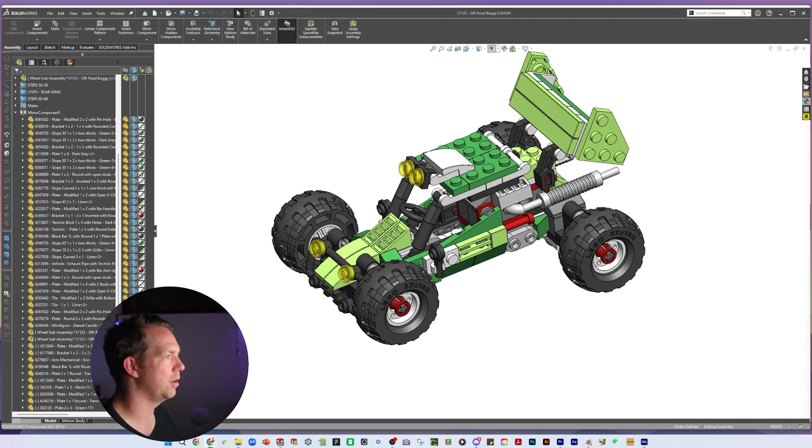I think I like that one the most. In this episode today, we're just doing one model.

It's here. This one. Nice and simple part, but a little bit of geometry, a little bit of detail, using a shell feature and some other tricks. 5 features in total.

Let's check it out. So these parts are called a slope curved 2x1 with 1 1/3 recessed stud. Not overly complicated, so nice simple geometry. This is a good one for beginners.

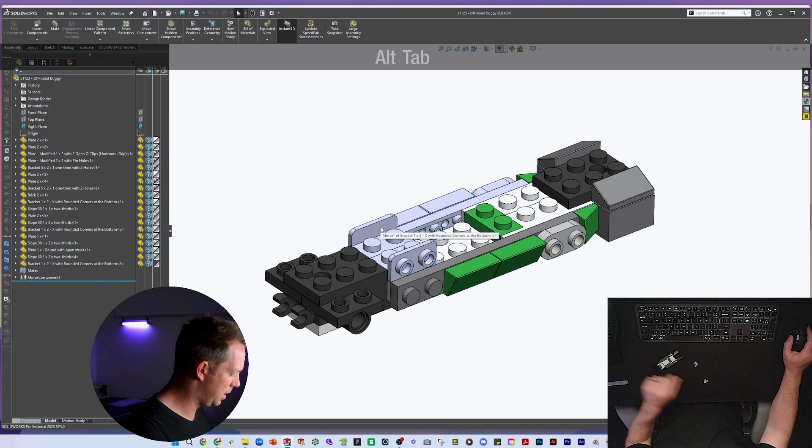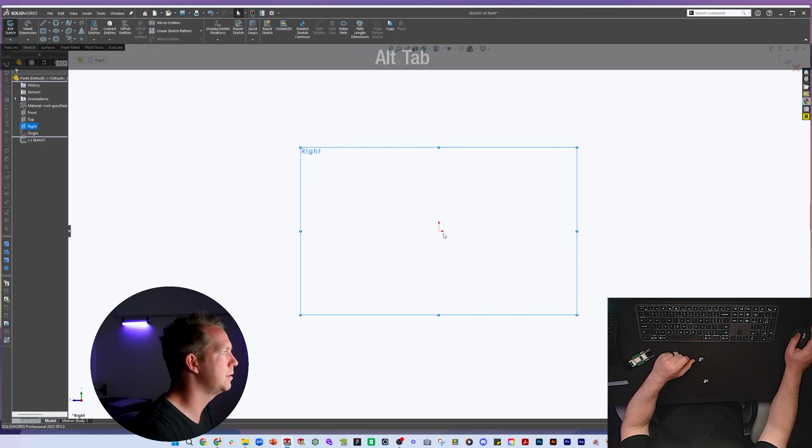Let's go over and start a new component. Now, this part here, this shape, we can see we're going to draw it on the right plane and then extrude it mid plane from there. So right plane, and we have to pick our origin. I'm actually going to put the origin as this corner, because typically that'll end up as a flat on another part. So I'm just going to draw the general shape, sketch it all in one path.

Now for this curve section, the top, when I take my cursor out and I've got a straight line, to get an arc, I can just take it back to that point, and then move it out again, and I will move to an arc automatically. The next line I do after that, though, will be straight once again, so I can continue on with my shape. All right, there we have it.

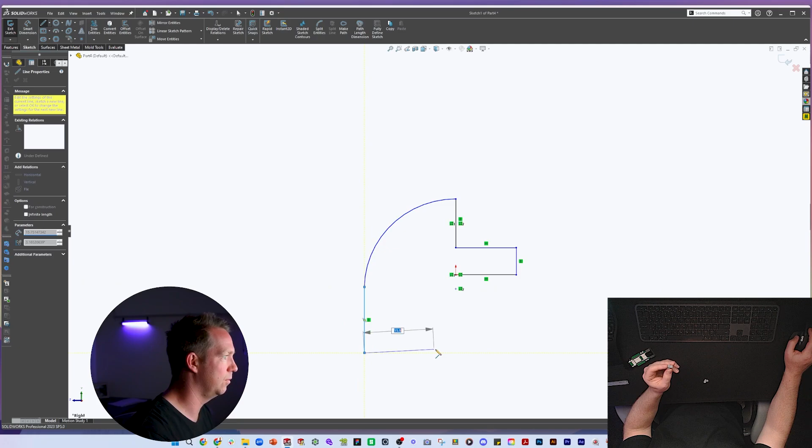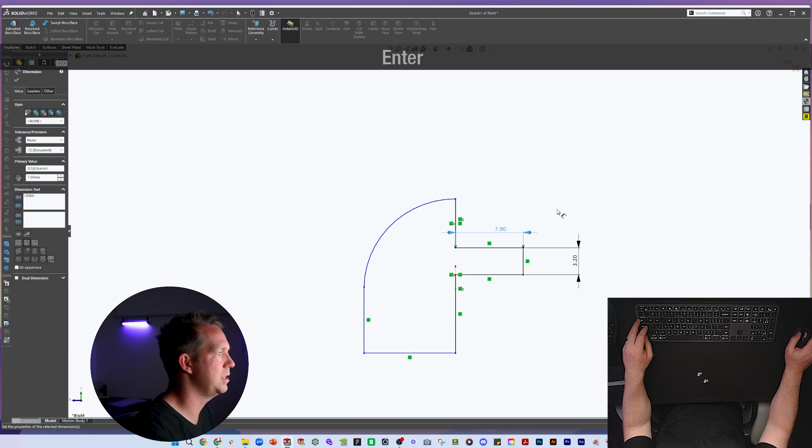Now, we have some existing geometry that we can use as reference for some of these dimensions. If we use this brick over here, for instance, we can see that this part is 3.2 high, so we expect that to be the same here. And we also expect the width of that section to be 7.9, which is our magic number for one section in Lego, 7.9, at least in our files anyway.

We do have one block dot on the top. That dot size is 4.85, and that goes up 1.8 millimeters. So we're going to do that in a minute once we get through this next detail.

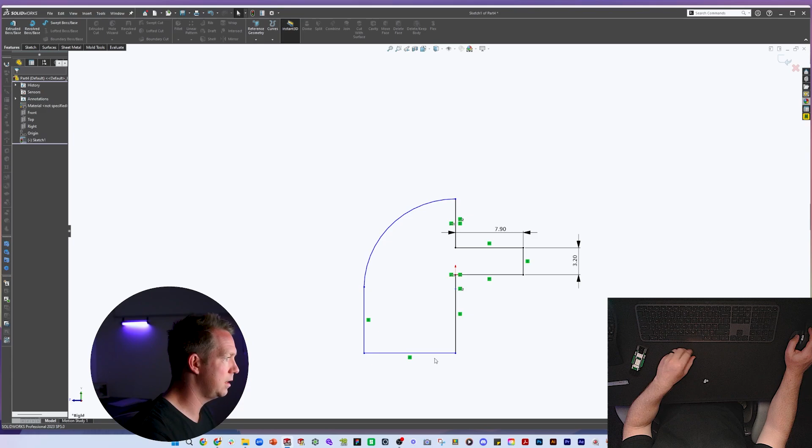Now the rest of it, this dimension here is going to match this width, so we're going to make them equal. That's going to be 7.9 as well. I'm fairly certain. Let's double check with my calipers. 7.9. Okay, so we've got a few other elements to work out here.

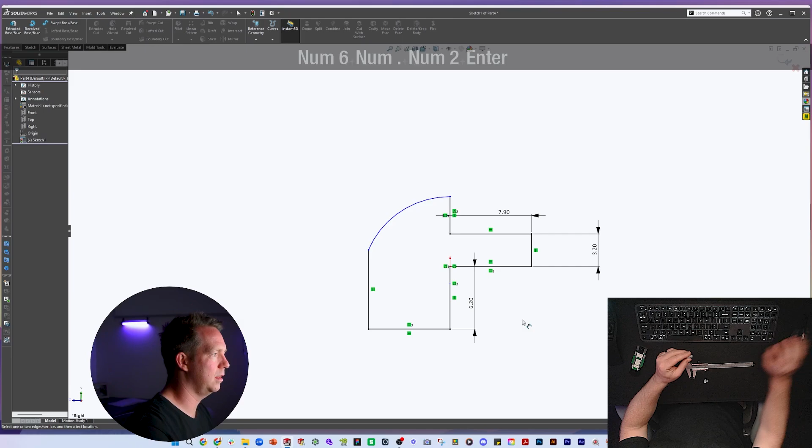First, the depth, getting a measurement of around 6.2 for this section. Now, when we assemble this with our other parts, we might see that needs to be tweaked a small amount. That's fine. Now this point here, I need to make that tangent.

The quickest way to do that is to select that point, go to our shortcut menu here and click on Make Tangent, and I'll add that for you. And now we also need to select the depth of that upper section. We get a dimension of around 3.2.

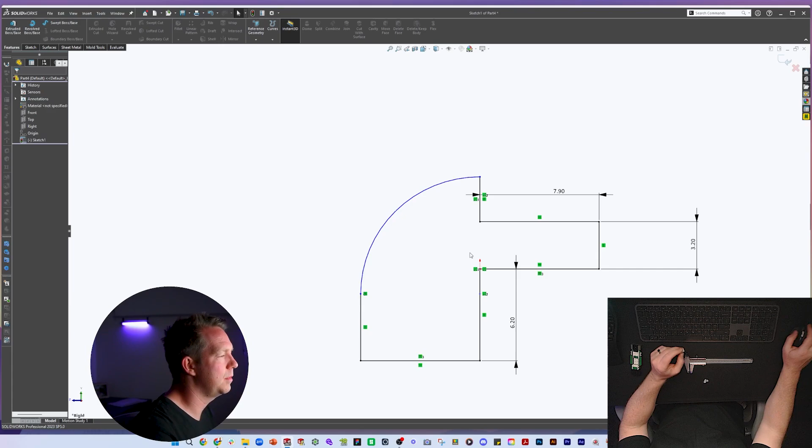And if I fit these parts one on top of the other, I can see that makes sense. Okay, they join quite neatly. So let's go with that.

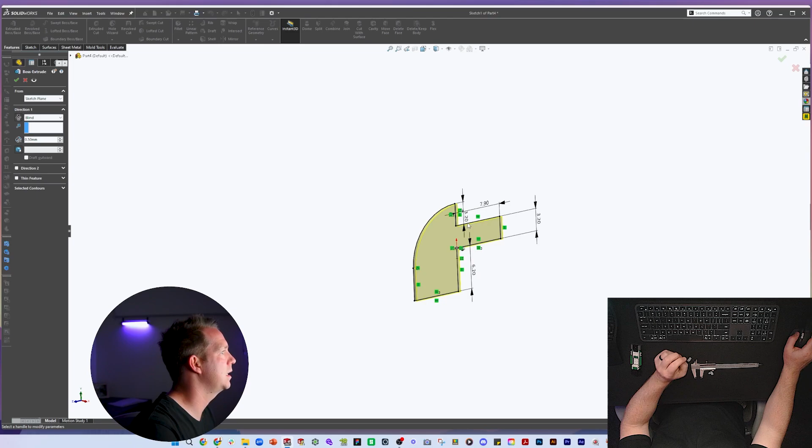All right, and then extruding to the sides, once again magic number 1.2. Now I have a hotkey set up on my keyboard for extrude, which is the letter E. So I hit that, and that goes to my extrude toolbar properties, and then I can select mid plane and put in my dimension.

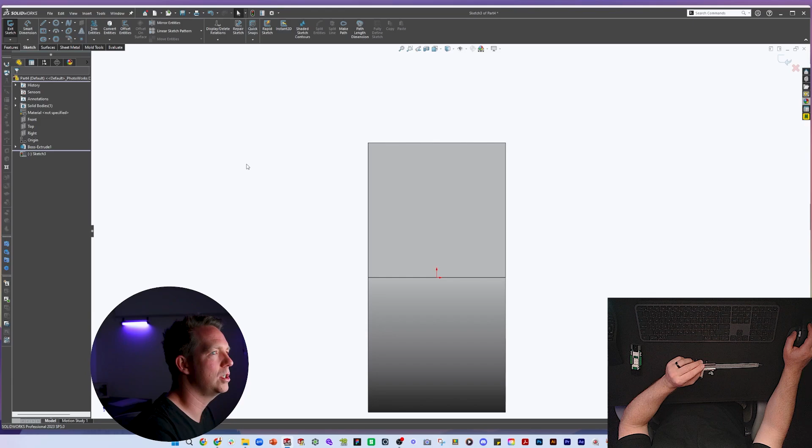Okay, excellent. Now let's do our circle on the top. So we're going to do a sketch on this face. I select the face, then go to my shortcut menu and click Sketch here for a new sketch. Press the space bar to get my orientation on a top view, and then I'm using a mouse gesture to go to the right to get my circle tool and go out and type in my dimension, 4.85.

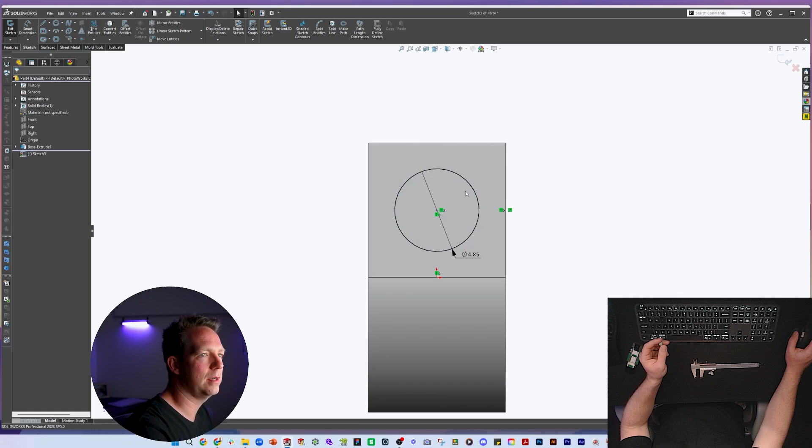I'm going to click on the origin and the center point of the circle to make them vertical, and right click on this edge, select midpoint, hold control, select the center point of the circle and make that horizontal. That turns my sketch from underdefined to fully defined, which is black. And now it's ready to extrude up. I'm going to change that to blind and done.

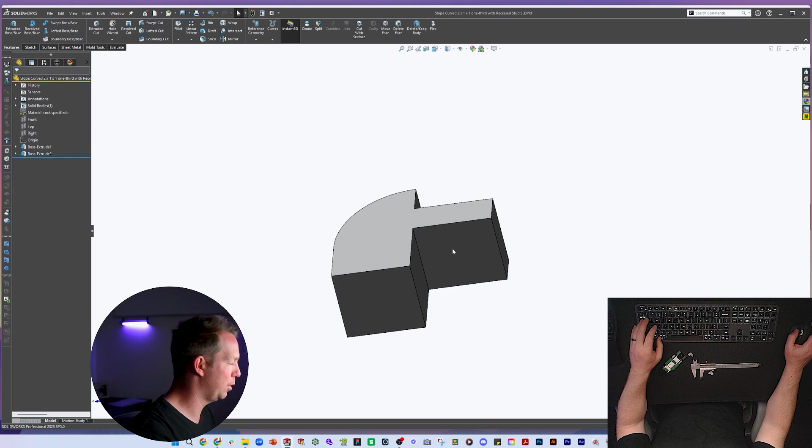All right, now there's a few more details to go. But before I do any of that, I want to save this part. I'm going to copy the name from this file and save so that we're not going to lose what we've just created. Now there's detail in the bottom of both of these. If we have a look here, that gives us an example.

It doesn't show all of the detail. Let's say the bit on the left is fairly close. The bit on the right is missing a shell feature that goes up into the block on top, that circle point - there's another hole there. So we're going to draw all that in.

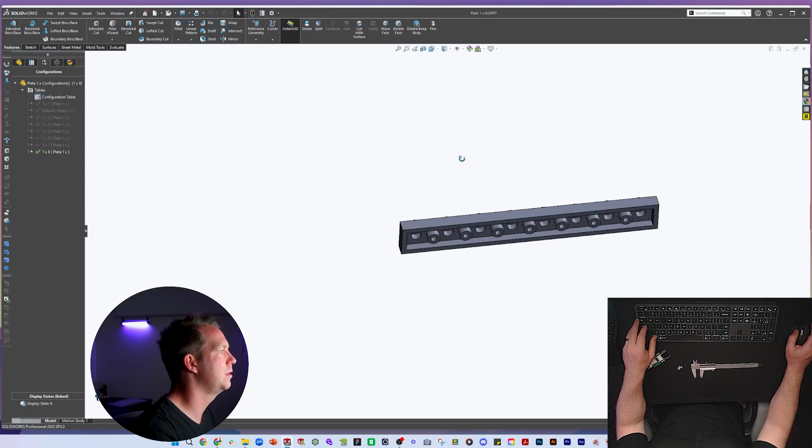We have previous examples of this, so let's reference those. Our shell feature, if we look at this example, is 1.2. The hole feature here is 2.45.

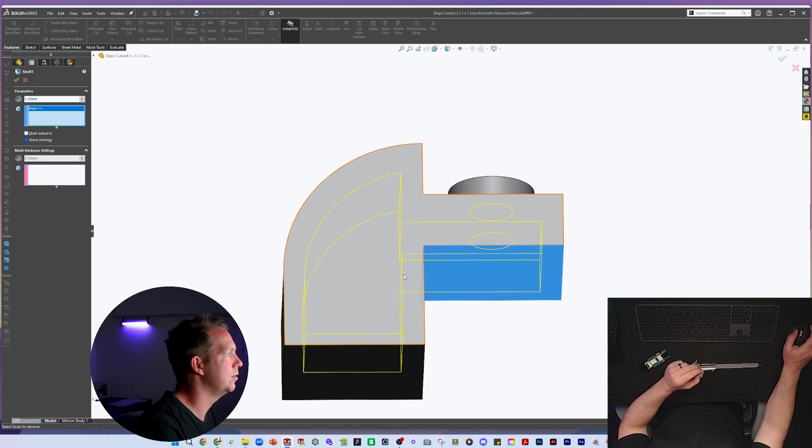Now, if we try to shell on this body of 1.2, we're actually shelling out a lot more material than we need to. This is not what we want to do. We have a solid wall that comes all the way down through this section too, so we don't want to lose that. However, using the shell feature will remove this curved material, which we do need to do in a separate step.

So I'm going to use this, but I'll also select this bottom face. It's also removing the material around that circular area. So I'm going to press OK.

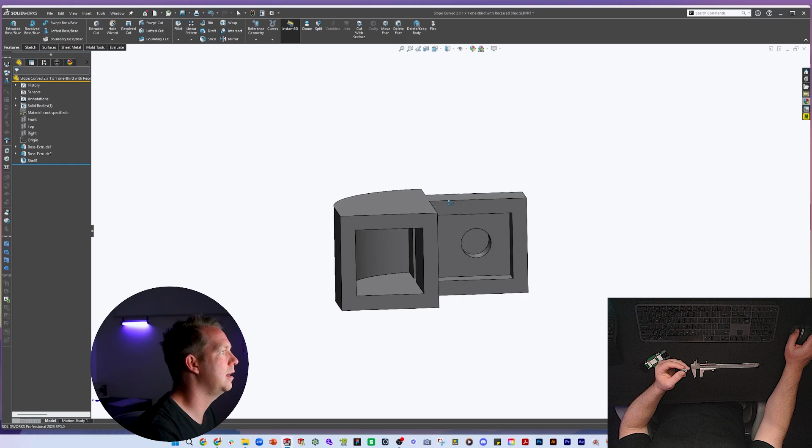The only thing I need to patch up is filling in this gap here where it's taken all that material out. That is a quick fix.

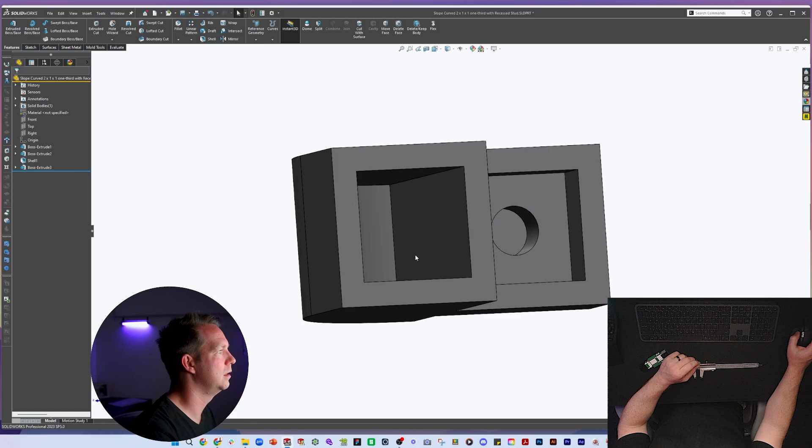I'm going to select this face to make a sketch and draw a rectangle between those 2 points, then extrude that. If I extrude up to this point, that now creates that solid wall for me, and this entire space is closed off. That is perfect for us.

The last step we're adding here is a rib, a very small rib. Typically these have been 2 or 3 millimeters, and this one is no different - about 2 millimeters long by 1.1 millimeter wide.

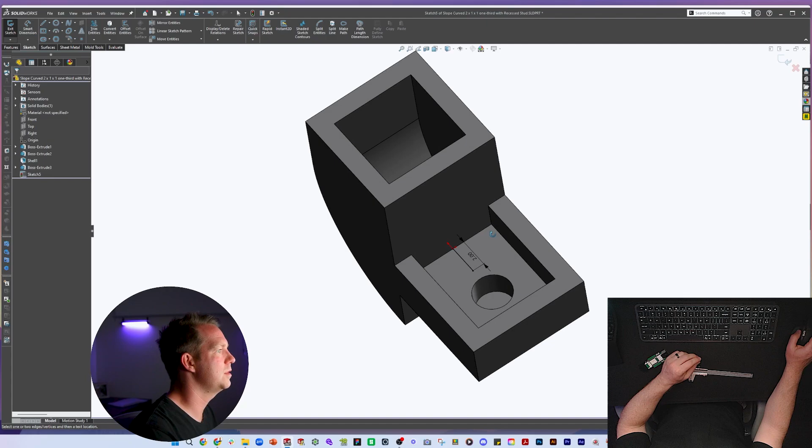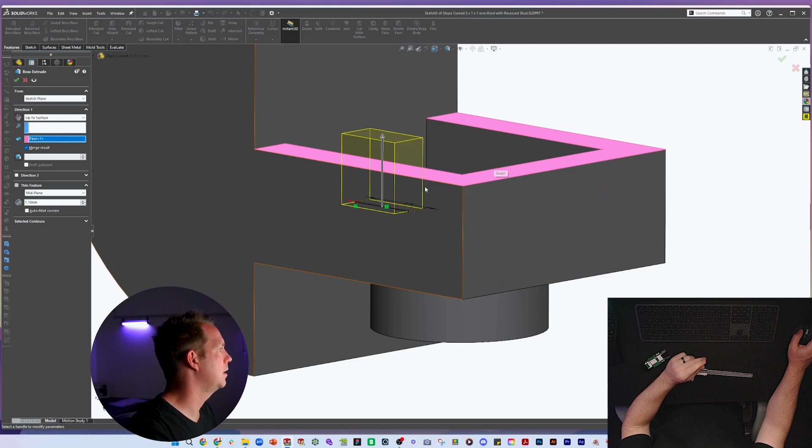For this feature, we're going to use a thin feature, since we only have one single line in this sketch. I'm going to make it mid-plane, change the thickness to 1.1, and set the direction going up to this face here, which means if this face changes anywhere in the feature tree before this feature happens, this feature will move with it. And we are done.

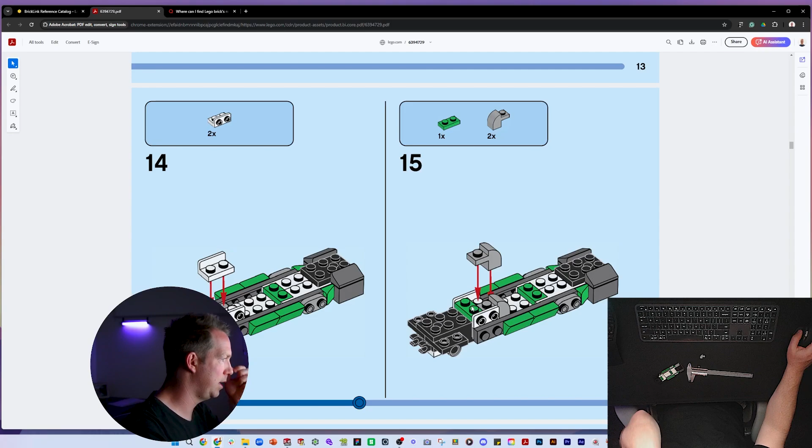That part looks great, so you can save that and take it into our assembly. We are putting 2 of them in behind another green piece. Let's go back to the assembly.

We're going to copy a green one and put that here, so that one's going there. Then the gray ones are going to go over these edges.

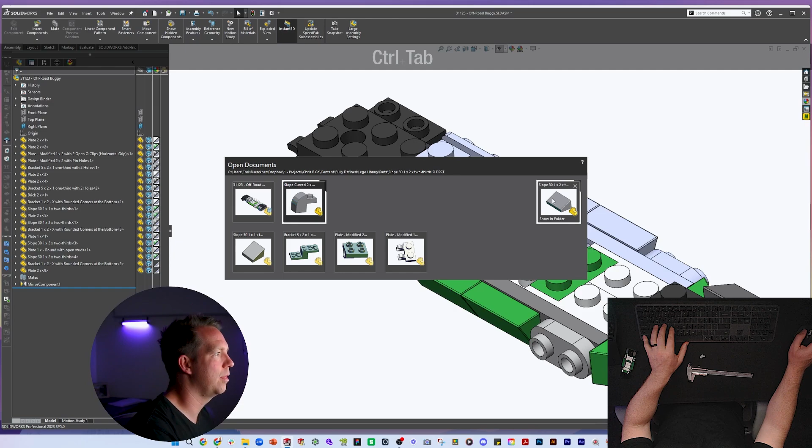When I'm trying to insert components now, I'm getting quite a few that are open, so I'm going to close some of these because I can always access them through my assembly if I need to make edits or put more of them in. Now I can just see there's one file I need to bring in, and it's right there.

So I just added a range of mates. If we look at the dimensions of this part now, let's do a section view and put our section view through the middle of this one. We can see how it's going for size and position.

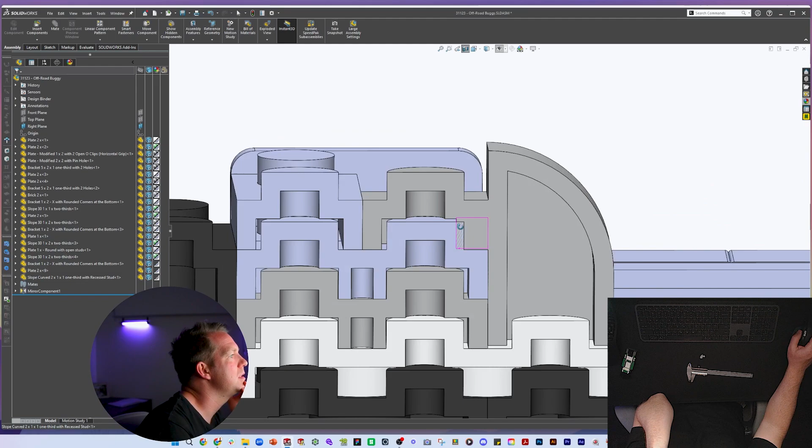We can also see that the rib maybe looks a little bit big. Most of these parts, the tolerances are looking really good, the fit's looking really good. But this one's definitely got an issue here - it's a little bit low.

So we're going to change that to 6.4. That's now perfect. And the rib here, that was 2 - we're going to reduce that to 1.6, 1.5. Okay, cool, that looks good.

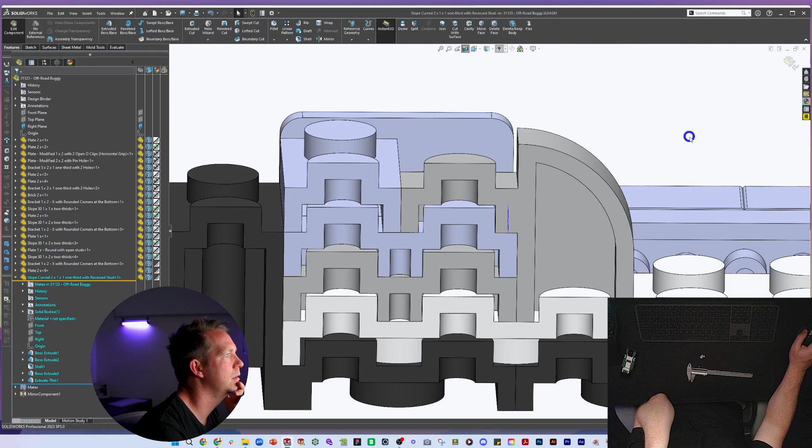Let's have a quick look through the rest of our assembly. So all the fit's pretty good, except for this black one here. I think that is another rib feature.

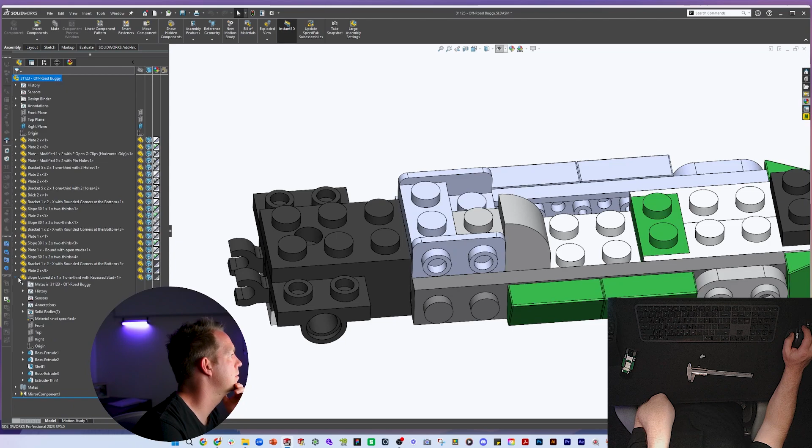Let's edit that part and find out - yeah, it is a rib feature. So let's reduce that down to 1.5, and now that is much better. Can I make this one 1.5 as well? Yeah, nice. Let's add that component into our mirror and keep going.